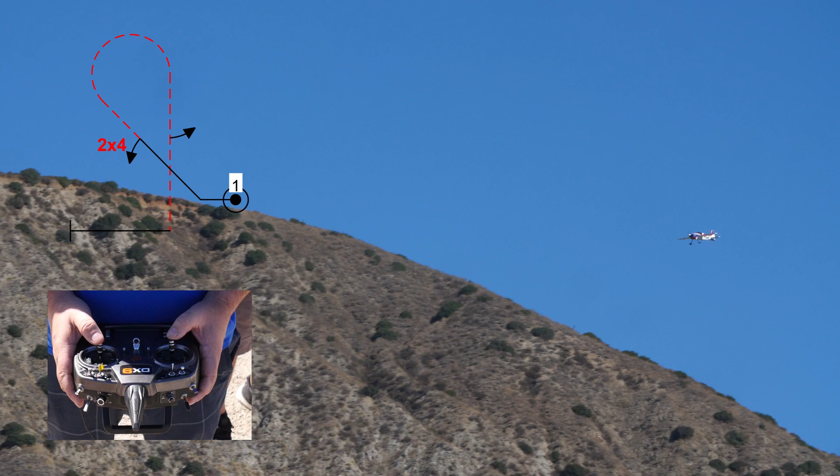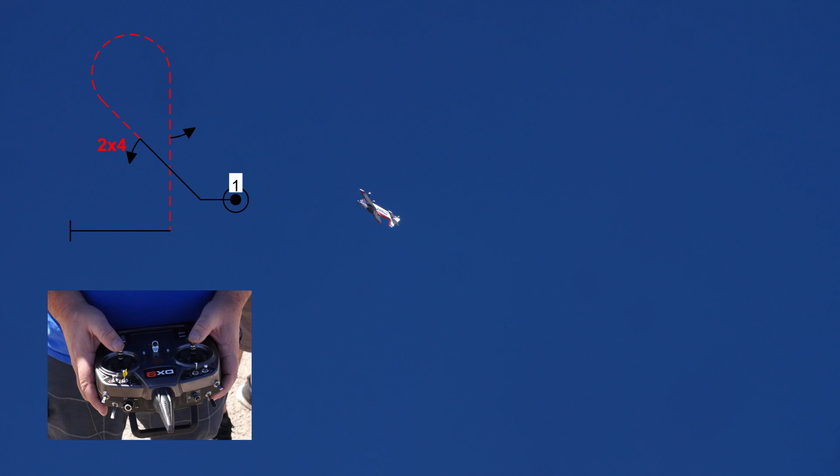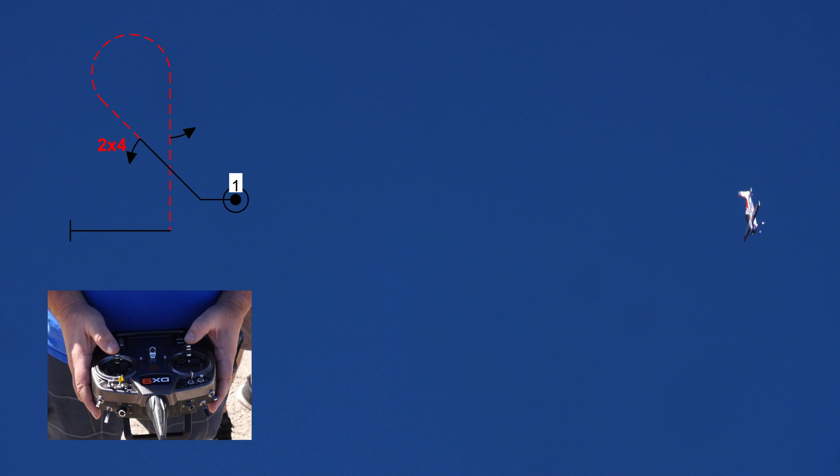Okay, we're gonna call it in the box. We're gonna pull about here. Nice 45. 1, 2, push, 5/8 outside loop. Vertical downline, half roll, 1 and half roll. 1 and pull. Next maneuver is our hammerhead.

On this hammerhead, we have 2 of 4 on the way up, so we're gonna be looking at the belly of the plane. So it's important to establish a nice vertical line. 1, 2, hammerhead, high rate rudder, hover throttle. Precision mode. Okay, half roll on the way down, pulling to exit upright. Okay, next.

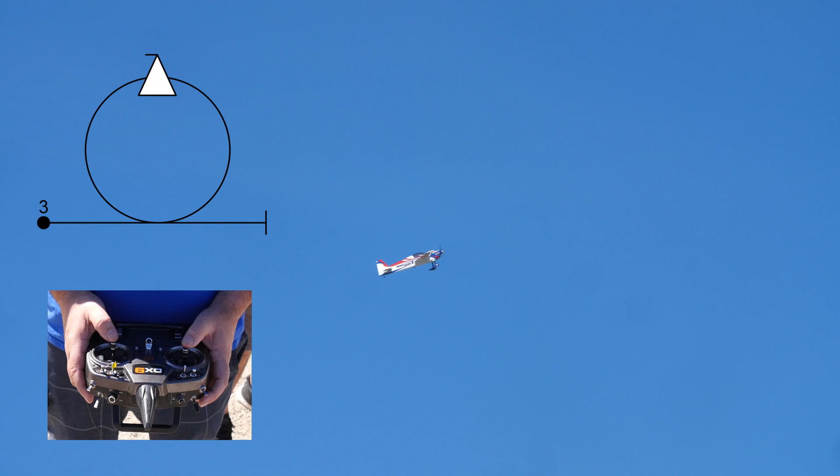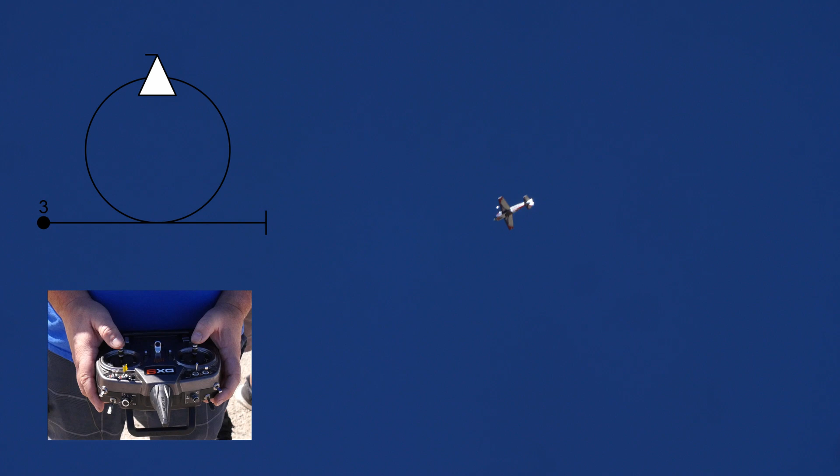Next maneuver is an avalanche. Avalanche is a loop with a 1 positive snap at the top. So right in front of us, we're gonna pull. Centered at the top of this loop, we're gonna do 1 positive snap, keeping the power in. And snap. And pulling all the way around. Just an upright exit where we started.

Next, our Immelmann 2, half rolls on entry. We're gonna do half roll, pause, pull. On exit, we have nothing.

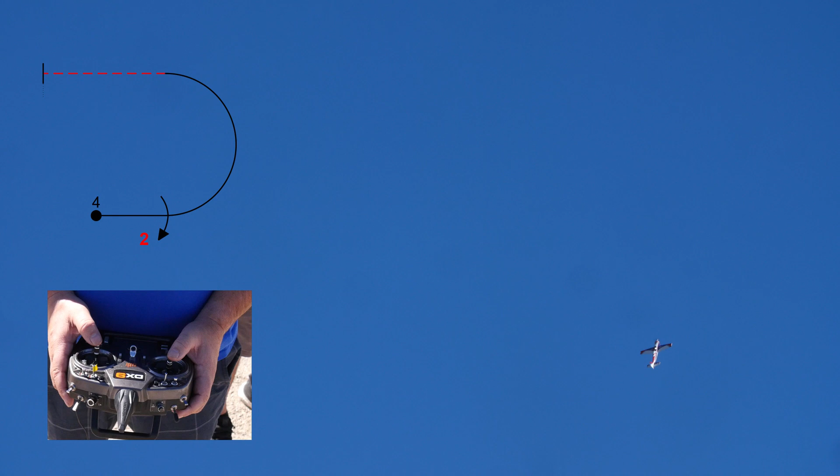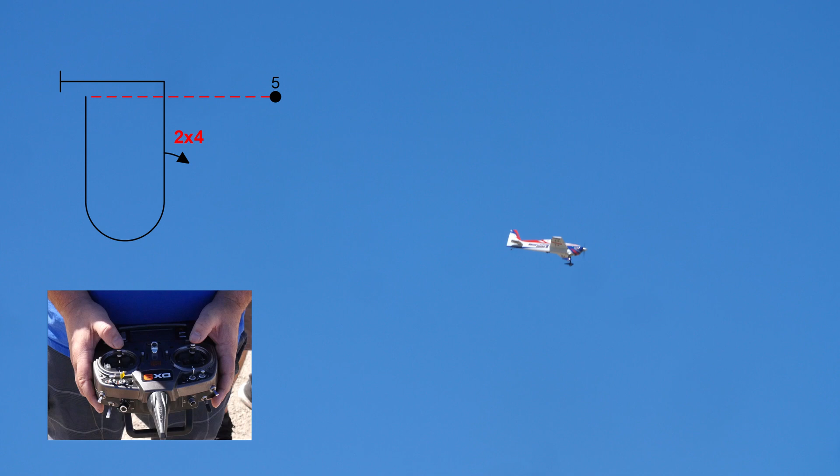Okay, next maneuver, center box, is our down humpty. We have nothing on the down line. Slow down so we don't have too fast of a down line, but don't lose all airspeed though. We're gonna pull to a vertical line, draw the line, we're gonna do nothing. Nice down line, half loop at the bottom to a vertical up line. 2 of 4 on the way up. 1, 2, 1, 2. Okay, next.

Okay, next is 1 and 3/4 turn spin. We're gonna be exiting this cross box, so you need to think about which way you wanna go. To go out, you're gonna spin left, looking for the bottom. To come in, you're gonna go right. We're gonna go ahead and go out, because that's usually best. So we're gonna look for the bottom twice. There's 3/4 and stop. Draw the line, I'm gonna pull to exit upright.

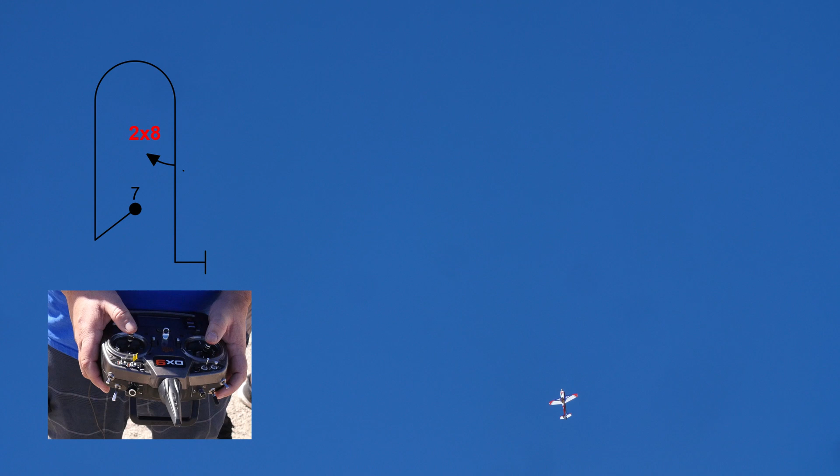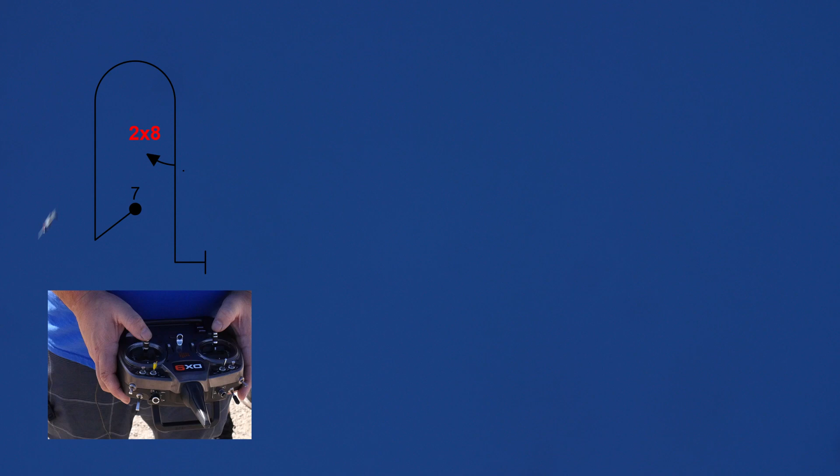Next maneuver is a humpty. Anything on the way up? Okay, draw a line, vertical up line on the way up, nothing. Now here's where you can do your positioning. You can pull this nice big half loop at the top to get ourselves back in here a ways. Then we're gonna do 2 of 8 on the way down, and we're gonna be doing it to the right because we're pulling to exit upright. 1 and half, 2 of 8, little rudder. Pulling to exit upright. Next, goldfish.

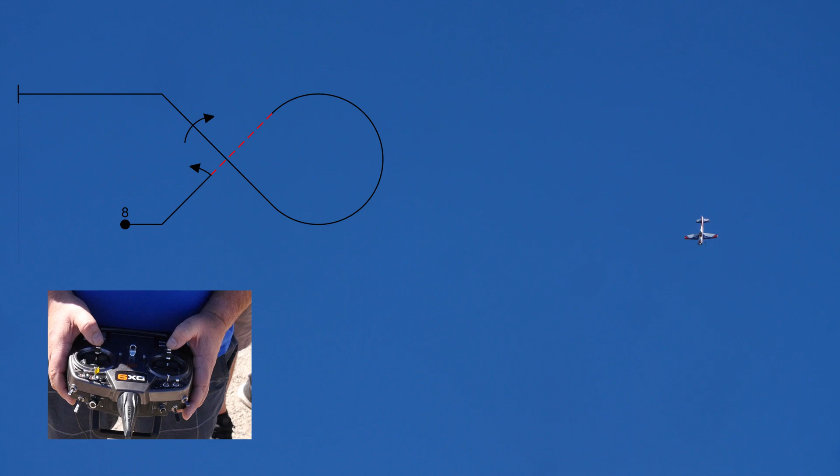What's on the way up? Pull 45, 2, 3, half roll, 1, 2, 3, maintaining that 45, 3/4 loop after we get to the top here, all the way around to another 45 up. On this 45, we have 2 of 4. Full roll, sorry about that guys. Full roll on this 45, 1, 2, full roll, 1, 2, pushing to exit.

What's next? Now we're doing our reverse shark's tooth. So we're gonna push 135 to an inverted 45 with 2 of 4 on the inverted 45, Joe? Okay, so we're gonna push 135 to an inverted 45, 1 and 1, 2, pulling to exit upright.

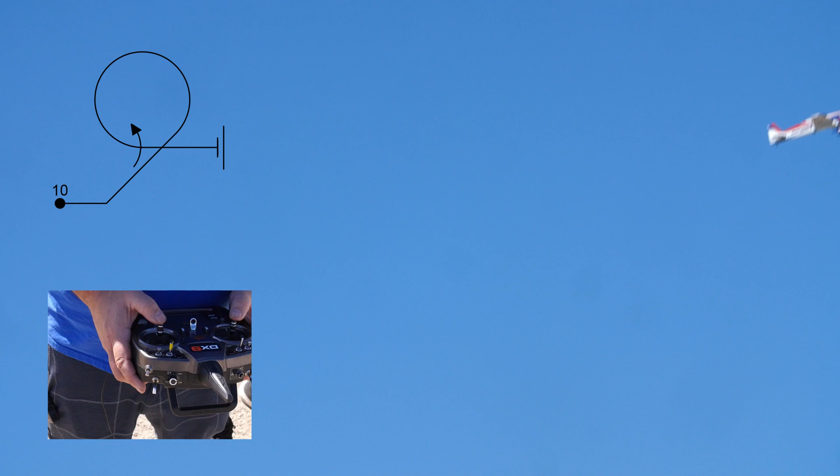Figure Q, next is a figure Q. Okay, we're gonna pull to a 45. We're gonna do nothing, we're gonna draw a nice 45 line. Okay, we're gonna come up here, we're gonna do 7/8 of a loop, so we're gonna pull all the way around, all the way to level flight. When we hit level flight, we're gonna do 1 full roll.

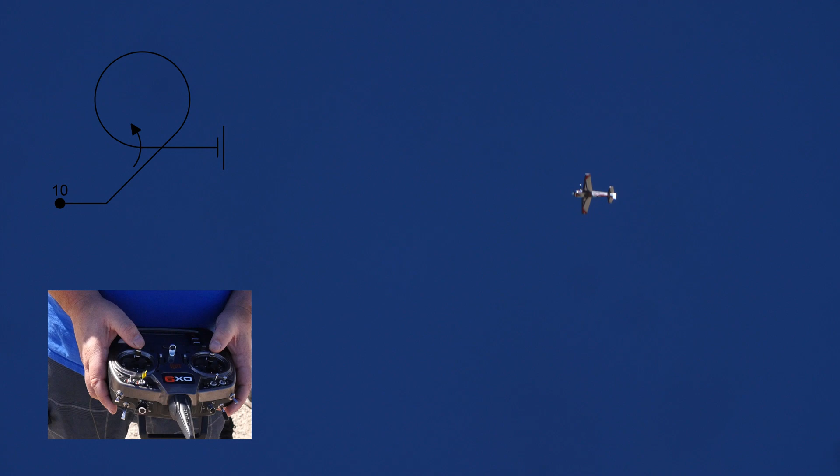Okay, so here we are. This is going to be the Sportsman for 2020, from left to right. Doing our turnaround maneuver down here, nice altitude, setting up for our teardrop, which is a fairly tall maneuver.

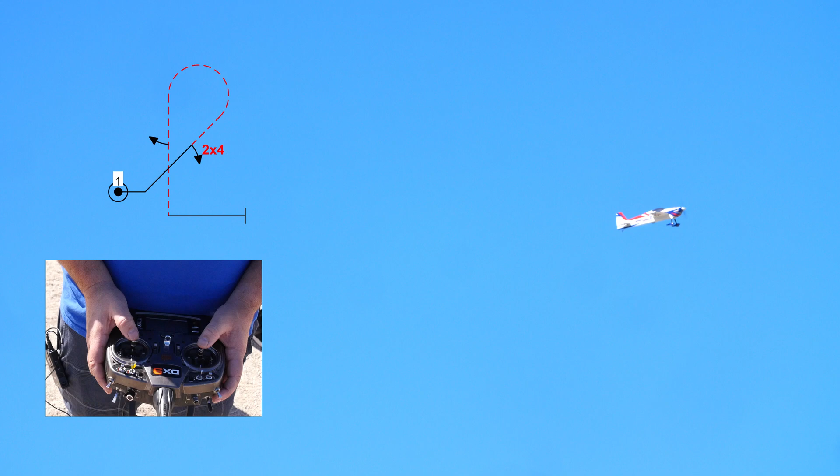Okay, call the box judges. First thing we're gonna do, pull to a 45. 2 of 4 on this 45. 1, 2. Push all the way.

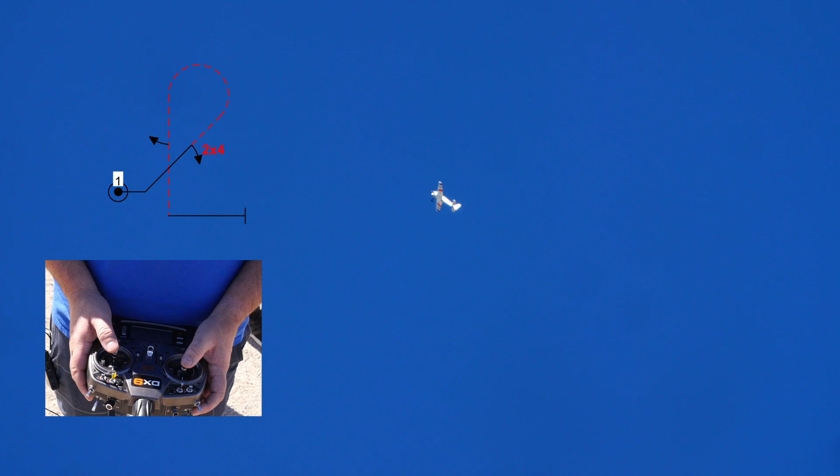5/8 outside loop to a vertical down line with half roll on the down, Joe. Okay, half roll on the down line. 1, and half roll. 1, and pull.

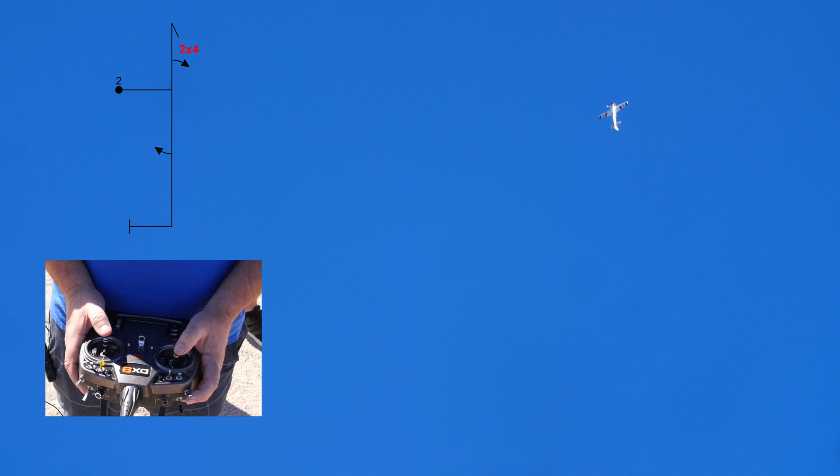Next, hammerhead with 2 of 4 up, half roll down. So we're gonna set up, pull a nice vertical up line. 1, 2, 2 of 4 up. Steering the tail here, back to hover throttle.

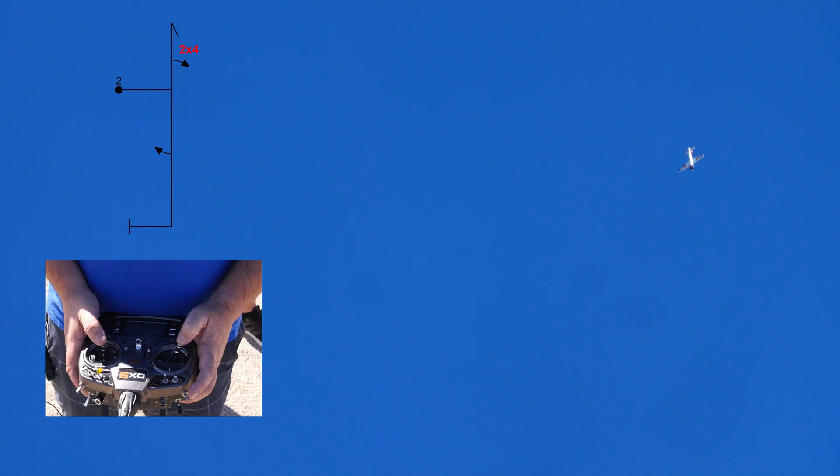Standing it on the tail here as long as we can. Hammering over, out of our high rates. Half roll on the way down, half roll, nice and centered.

To our Avalanche. Next is our Avalanche, which is a loop again with 1 positive snap at the top. So here we go, right in front of us, we're gonna pull our loop, get in the power. Nice big round loop at the top, 1 positive snap, staying in the power to keep the backside of the loop round. And snap.

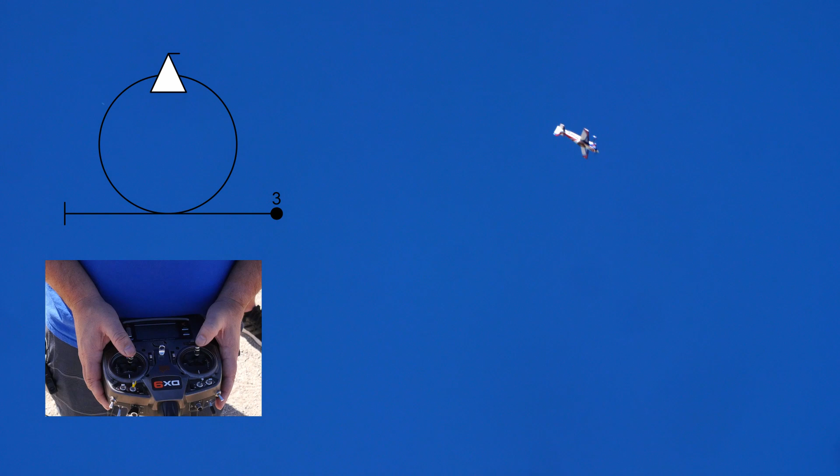Driving it back down there, right back to where we started. Okay, next is our Immelmann with 2 half rolls on entry.

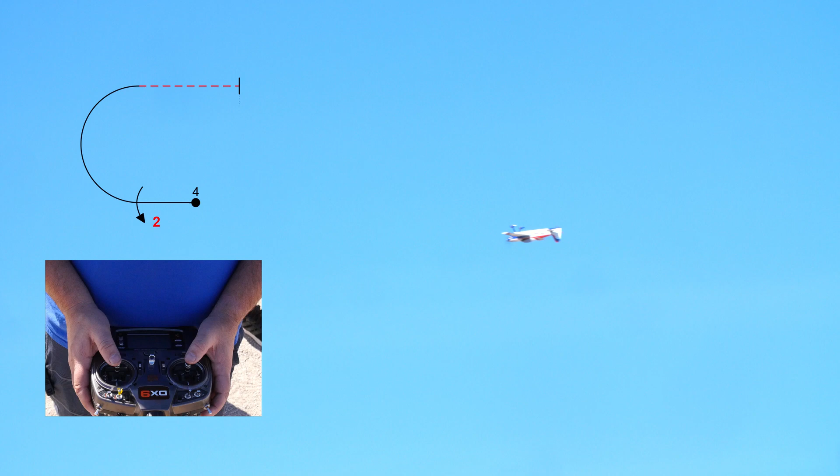Here we go, we're gonna go 1, 2, pull half loop. Nothing on the exit. Setting up for our down Humpty.

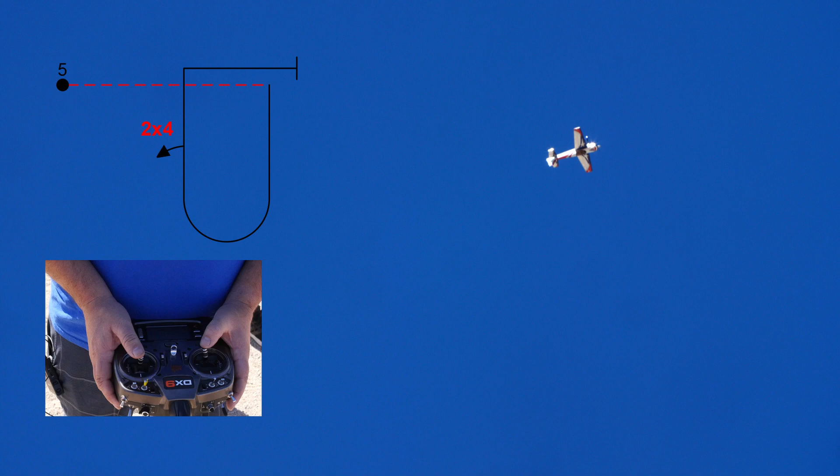Okay, what do we do on the down Humpty? Okay, 2 of 4 on the way up. Okay, so we're gonna drive it just past ourselves, pulling a vertical down line, doing nothing. Draw a nice down line.

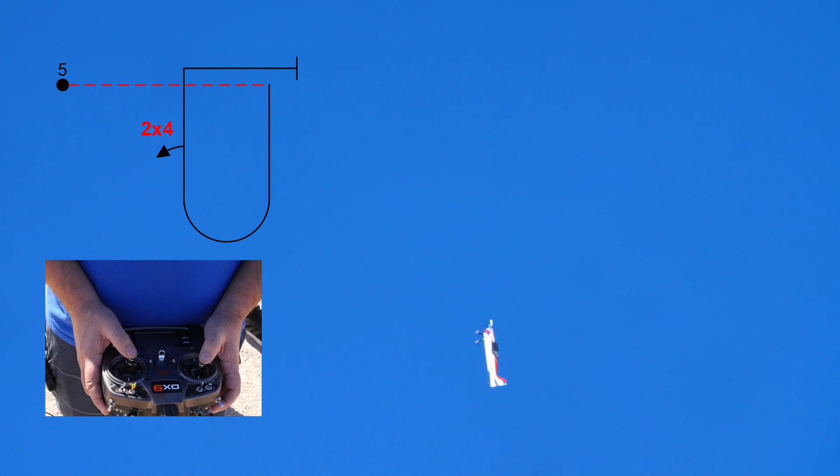2, 3, pull half loop to a vertical up line. 2 of 4 on the up line, go. Pushing to exit upright. 2, pushing to exit upright.

Okay, next, 1 and 3/4 turn spin. We're gonna go right to exit outbound on this. You could go left to come inbound if you wanted. Basically, we're gonna look for the bottom of the plane twice here.

Here we go, there's our break. And there's 3/4, stop it. Adding a little rudder to keep it straight. Pull into exit outbound, doing nothing.

Okay, now draw your line, pull vertical up line to your Humpty bump, nothing on the way up. So we can draw a nice line. Okay, pulling our half loop on the outbound here, or back in, bringing it back in.

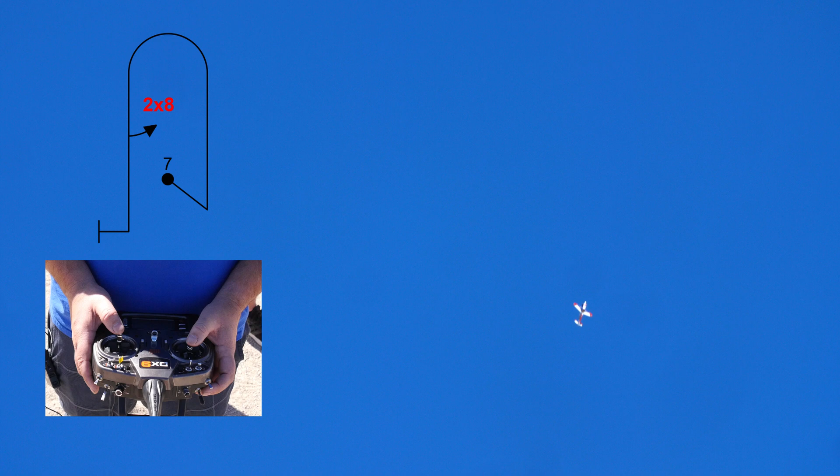We're gonna do 2 of 8 to the left here, and 1 and 1, 2 of 8, pull into exit upright. Setting up for our Goldfish.

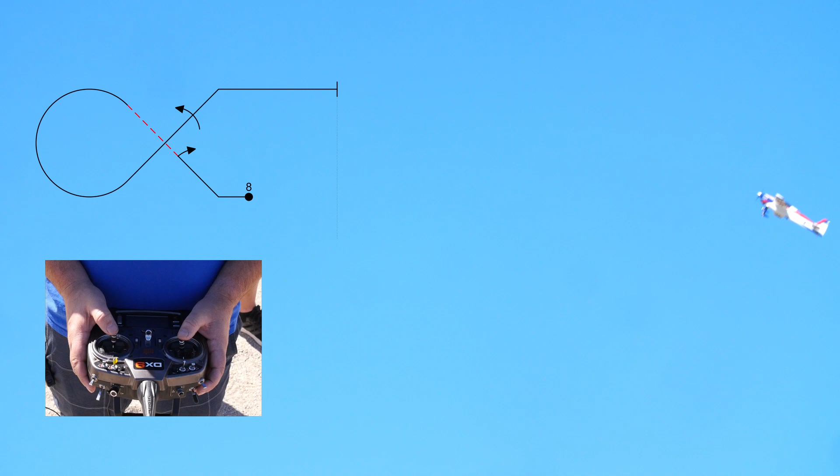Goldfish has 2 of 4 on the first 45, full roll on the second 45. Sorry, half roll on the way up. So pull to a 45, 1 and half roll, 1 and pull for 3/4 loop, all the way around to another 45 up with 1 full roll.

Getting in the power here, 1 full roll on this 45 up. 1, 2, 1, 2, pushing to exit. Setting up for our down shark.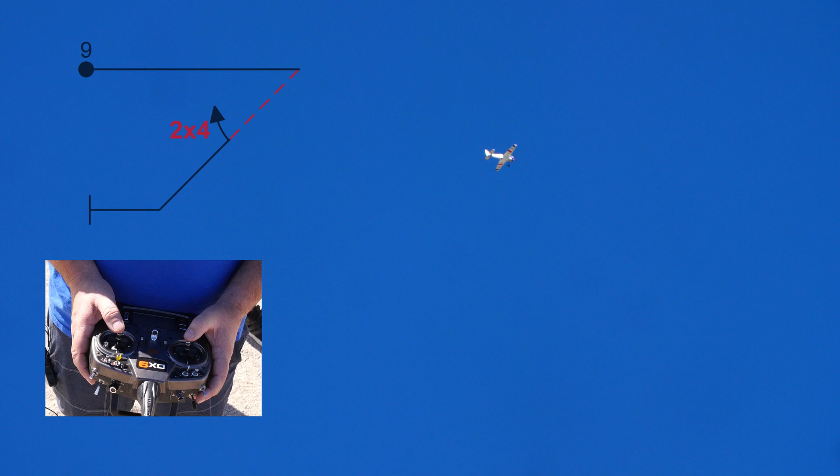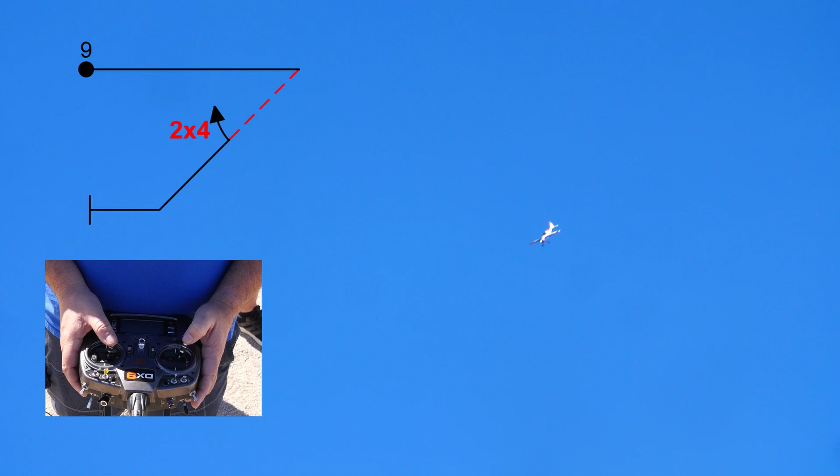It's push 135 to an inverted 45 with 2 of 4, correct, Joe? Correct. Okay, drive this down here, push 135, 45, 2, 1, 2, 2, pulling to exit upright.

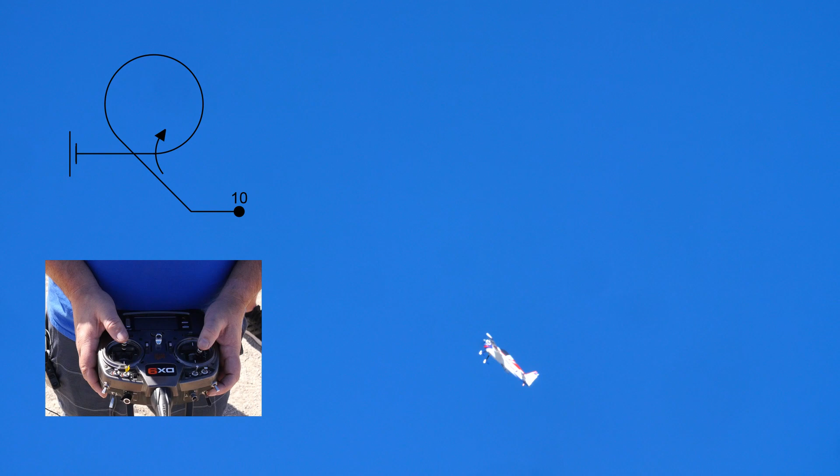Setting up for a figure Q. We're gonna pull 45 and do nothing. Pull 45, 1, 2, 3. We're gonna pull a 5/8 loop, nice loop.

It's gonna come out fairly high here, and we're gonna do 1 roll on exit. So get out of the throttle on the downside of our loop, back in the throttle for our roll. Box, judges.